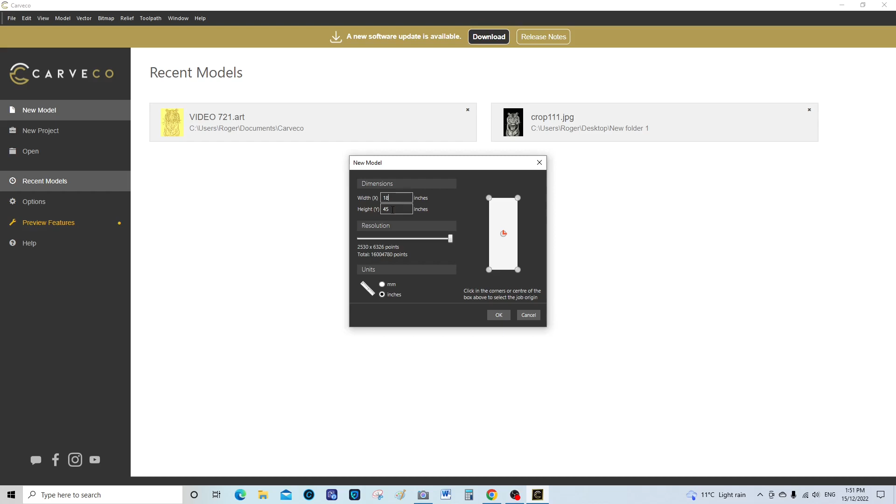So we're going to say OK. So I'm going to be working in the 3D screen today. So that's the 2D screen, and this is the 3D screen.

And we're going to, first of all, use several tools here that I don't normally use, so I'm going to be introducing them to you, or shall we say several processes.

Now, to use these processes, there's a particular way of working. So what I'm going to do is, first of all, draw just one single line at the top of our piece of work there. Now I finish, and then I'm going to draw a line on the bottom of our piece of work here.

Now in Carveco talk, these are drive rails. In other words, it's like rails for a railway. I am going to do another shape just off the piece of work here, and I'm going to tell Carveco that I want to run that shape, or drive that shape, down these two rails.

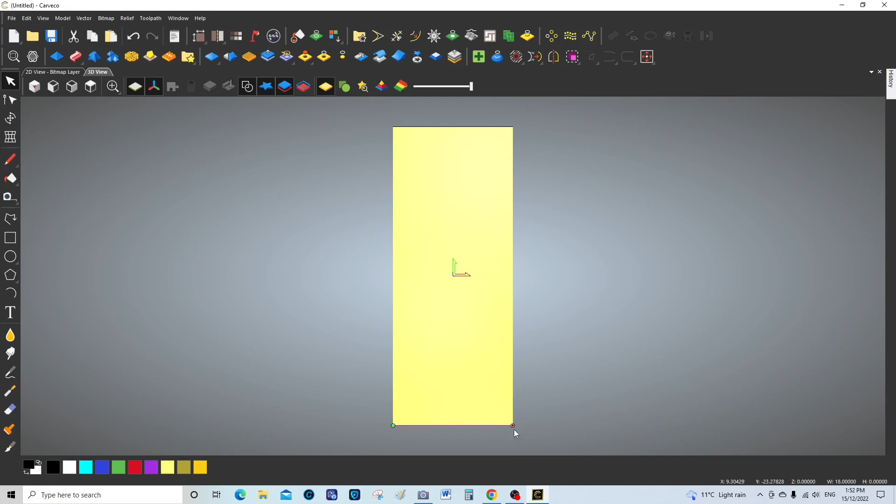Okay, so we're going to pick that tool again, which is a Polyline tool, and we're going to say we want rounded smooth polylines. So I'm going to start up here off the piece of work, well, fairly close to the piece of work actually there. So that's going to be our first point there.

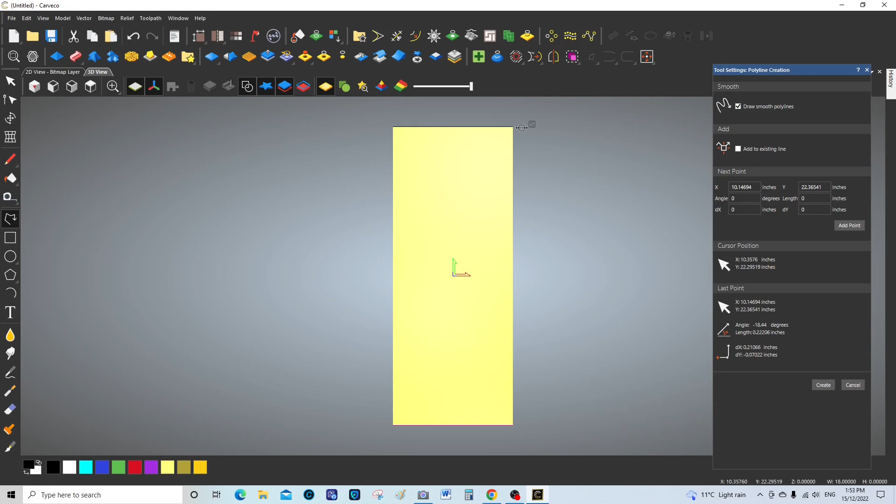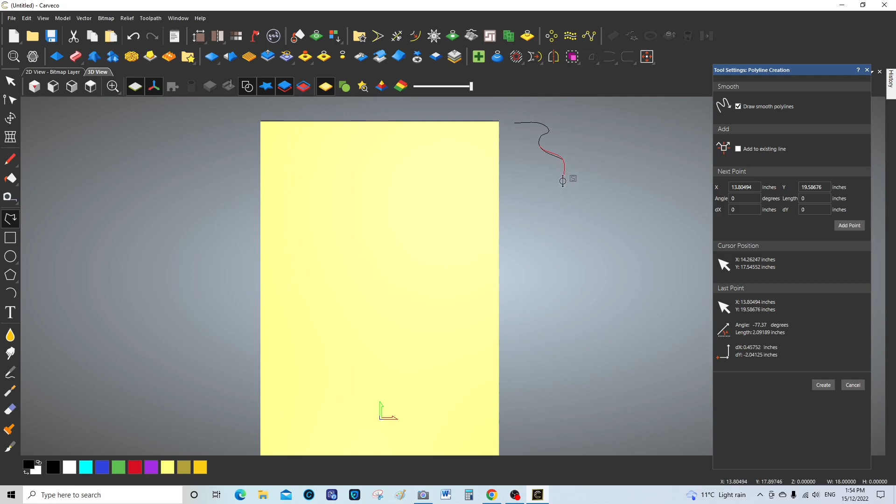I'll zoom in a bit so you can see in a bit of detail what I'm doing. So I'm going to come out here a bit, just put a bead, as it were. Make it a nice big bead. So I'm going to go here like this, and just wrap it around there like that. I'm going to come down a little and then out this way. Just a pleasing sort of shape, really, that you would sort of expect a sort of a bed head. Hang on, let me just come out here a bit so I can see what I'm doing, get a better perspective on it then.

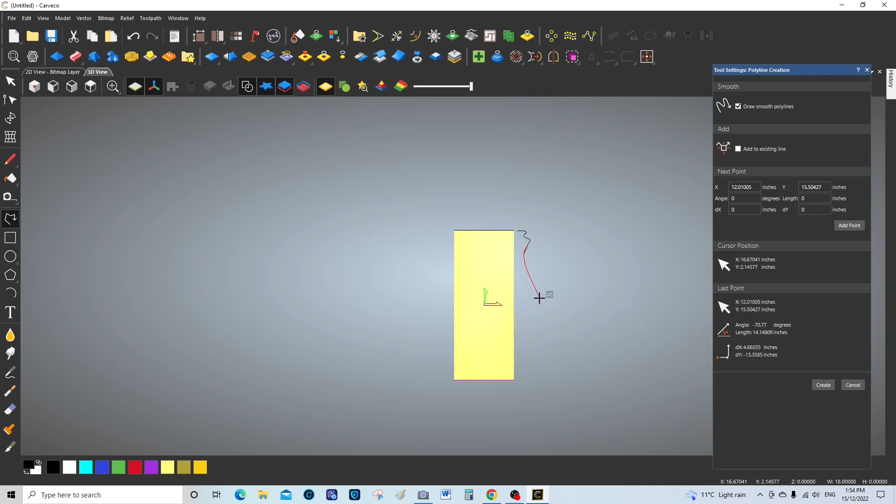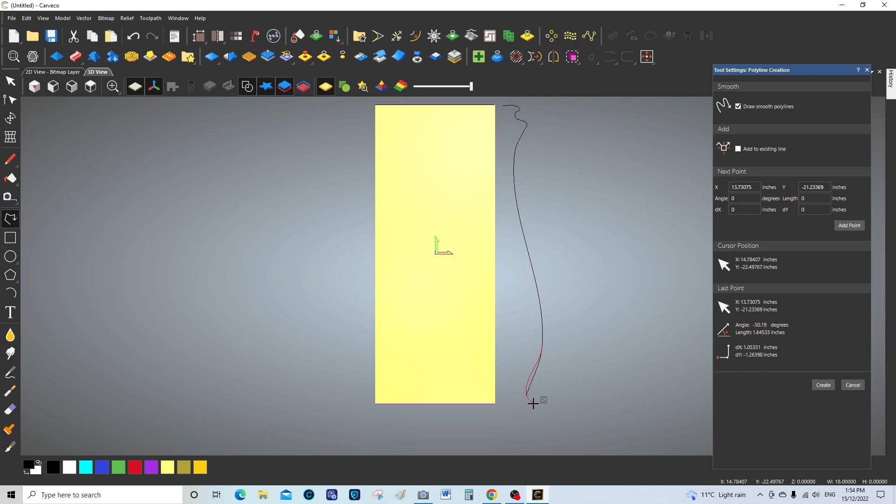So it's just going to be a rounded, elongated shape like this, sort of like a banister support. We're going to come in here a little, and that's good enough, and another small bead down the bottom here. Zoom in, sort of like there, with a little bit of a flat on it, like that, and finish.

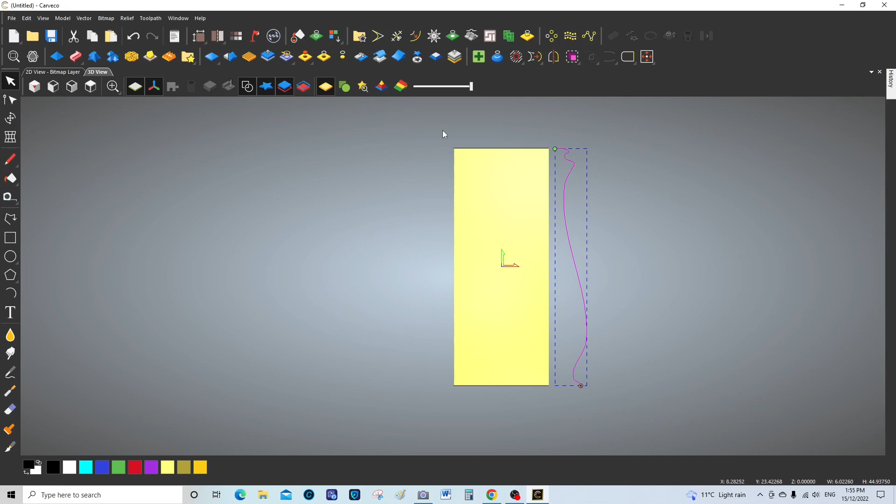Okay, so that's our shape that we're going to use. Now I'm going to come up here and choose the 2-rail sweep tool.

Now this is a dialog box, or you could regard this as a wizard, and what I'm going to do is choose this top one here, because it's asking you to set the first drive rail. So this is one of our drive rails, so we've selected that, and I'm going to press this to say that's the first drive rail.

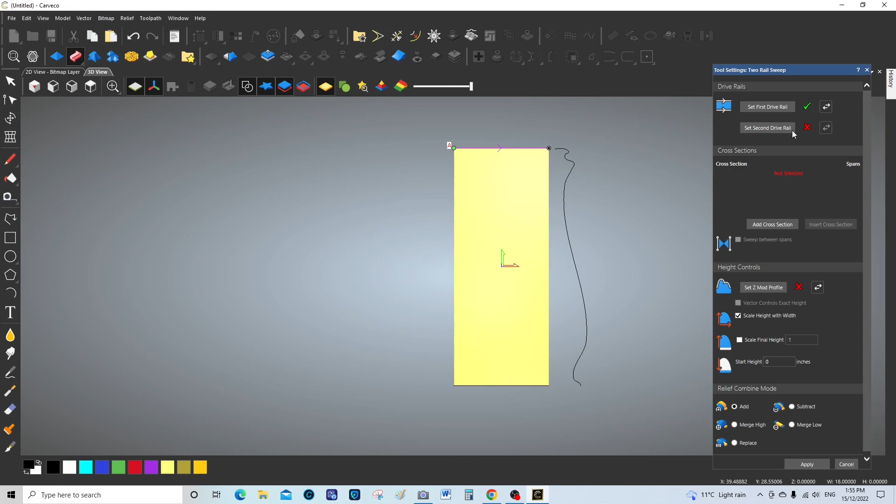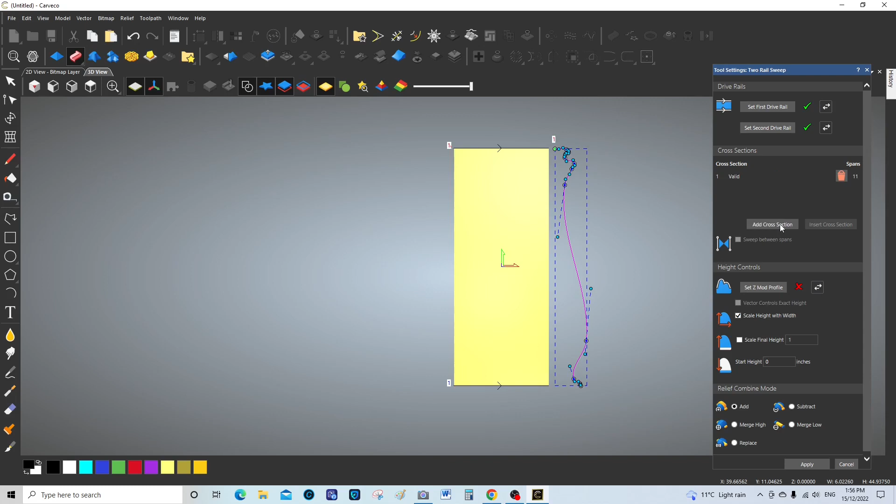So then it asks you to set the second drive rail. Here's the second one, and we're going to choose that. Now this is our cross section. Okay, so we're going to say, well, this is the cross section we want to use, and it's accepted that.

Okay, so the next thing is, it's already set on add. You can subtract it, which would give the opposite, down in this direction. So I would suggest adding this onto the material, and then I'm going to press apply.

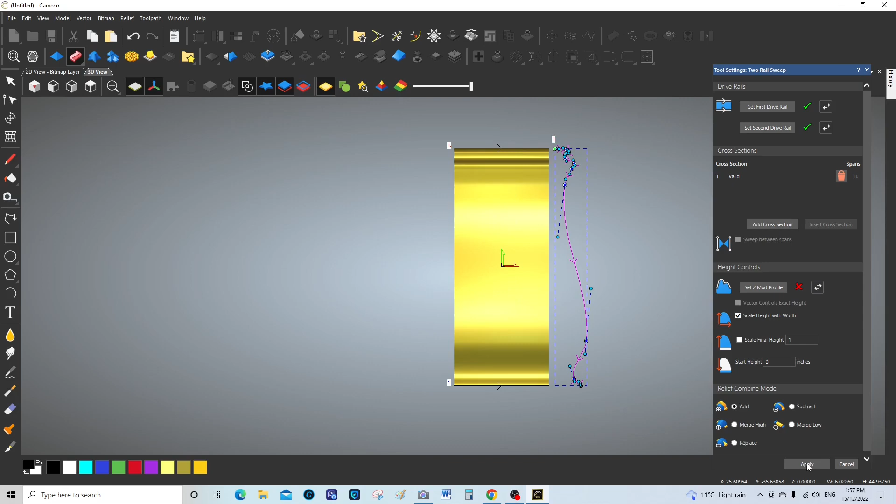We'll drop this, get rid of this now, and go to the Twiddle tool, and twiddle around with this and have a look. So there's our shape that we started with, and I've used the 2-rail sweep to run that shape across our material.

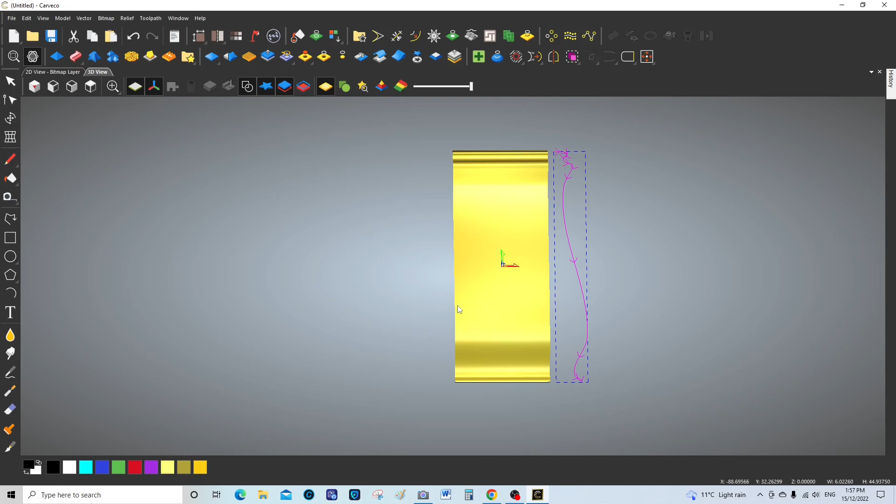And if you left it like that and ran toolpaths, it would carve that particular flat shape - well, shall we say that shape on a flat - and that's all you would have to do if that's what you wanted for something like a pelmet or something of that nature.

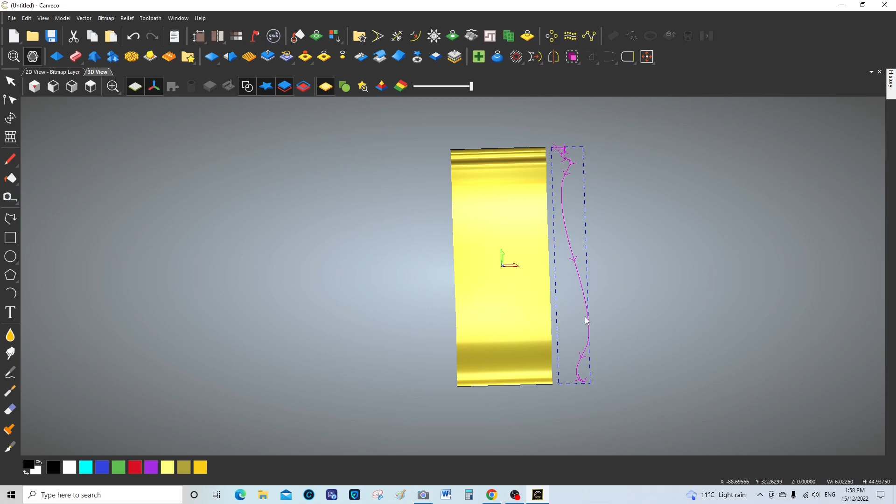But we want to actually wrap this into a Rotary file. But I'm going to do something a little bit more interesting. Let's look at it square on, and I'm going to go back into Carveco now and say, to make this more interesting, let's put a 3D relief on it.

I don't particularly want to - I could put texture on it, but I think we'll put something a little bit more interesting. Let me see, we could put an animal on it, but I think what we're going to do is... post, probably not.

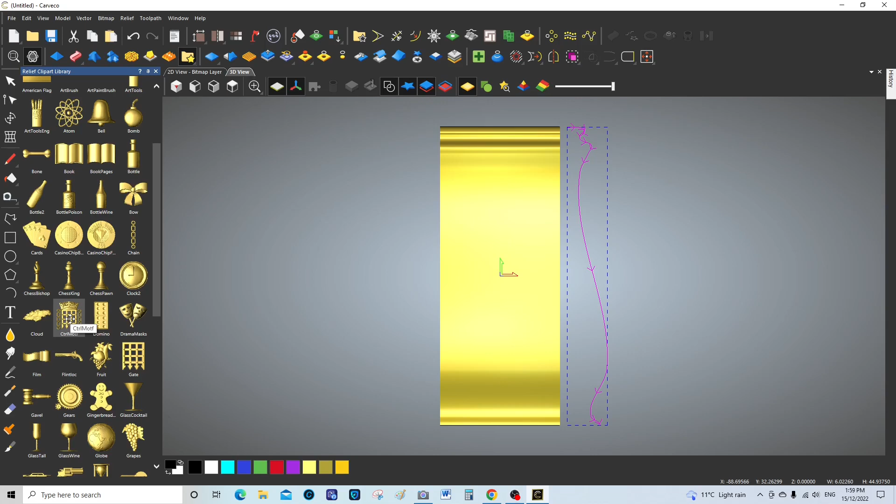So I'm just running through some of these now to just - objects maybe. I don't think there's - oh, here we go. That might be quite nice. That'll make it really royal, wouldn't it? You know, we could put that on. Why not? So I'm going to get that.

I'm going to bring that over here, and we're going to make that a lot bigger than what it is. We're going to say, let's have a look. Oh, that's very, very small, isn't it?

So what I'm going to do is put the lock on. Not really worried about the Z. So what I'm going to say is I want this 12 inches wide, and the aspect ratio is going to stay the same, so I'm going to say 12 inches. That means that's nearly 14 inches in height.

And I want this to be - I don't want it particularly deep, so I think a quarter of an inch would be okay. So I'm going to say 0.2 of an inch actually. I think a quarter of an inch might be too much, which would be 0.25. So I'm going to say 0.20 of an inch for the Z height. I'm going to apply that.

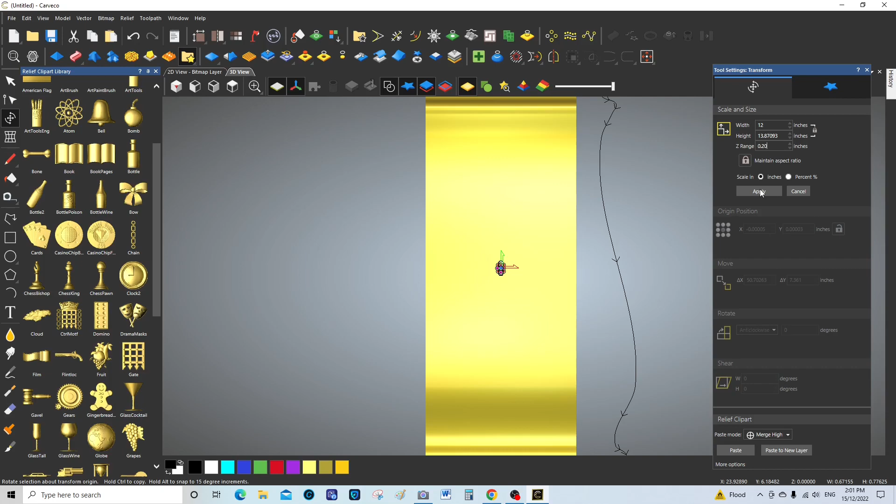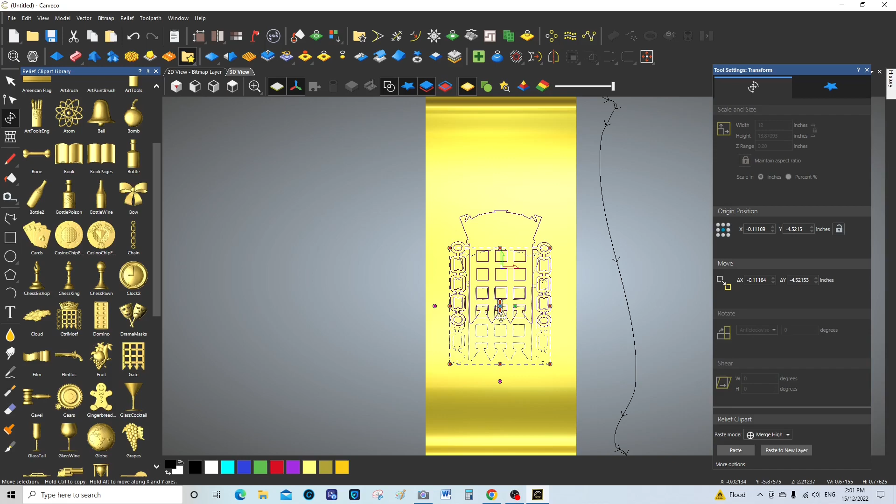Now I'm just going to bring this down slightly and place this by eye. I think I want to place it here, somewhere there, not quite on the tip of our rounded shape here. That would be fine, that's a good area. I'm not particular about placing it to 1/1000th of an inch, I think by eye is fine.

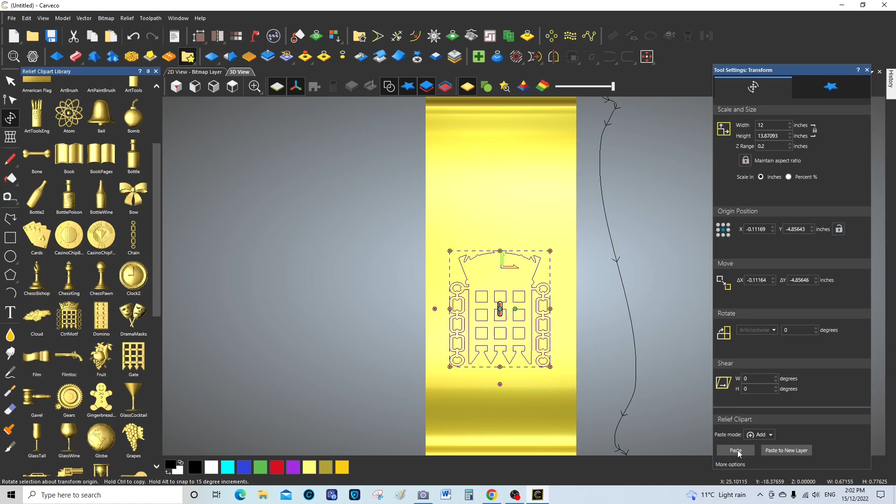I'm not going to say merge high, I'm going to say add on top of the material, because I find that's a better option for something like this. So I'm going to paste that down, and let's have a quick look at that.

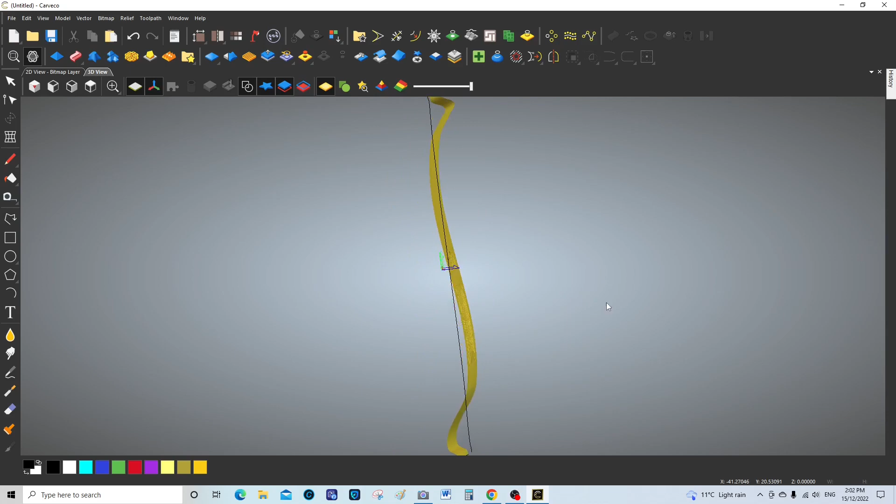So I'm going to get the Twiddle tool again and roll this over. Better get yourself a cup of coffee, this is going to be fairly long. That's okay, I just want an indication, I don't want it to be the major thing in this piece of work.

So what I'm going to do now is wrap this. Shall I wrap this now? No. Okay, I'm happy with that.

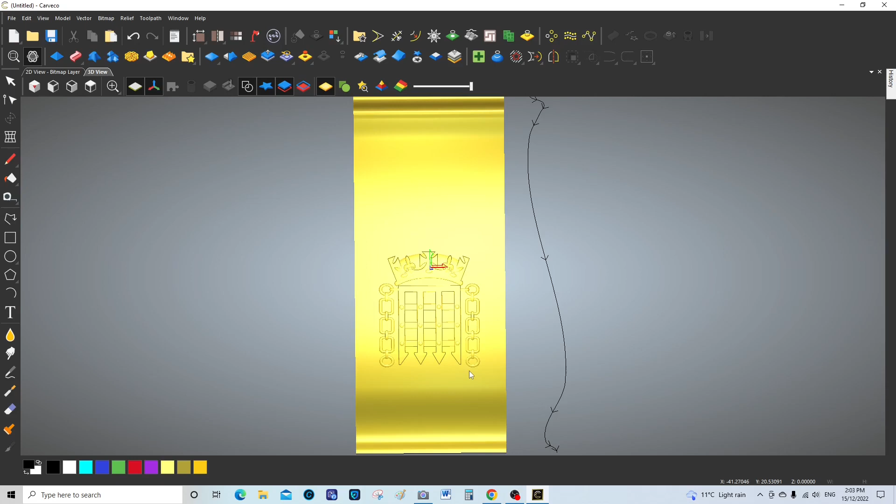So now I am going to machine this first. We're going to go up here to Toolpaths, 3D Machining, and the whole relief. I'll do a roughing operation. Of course this is in millimeters, now the inches tools are all the way down here, you just open them. This is a tool tree then.

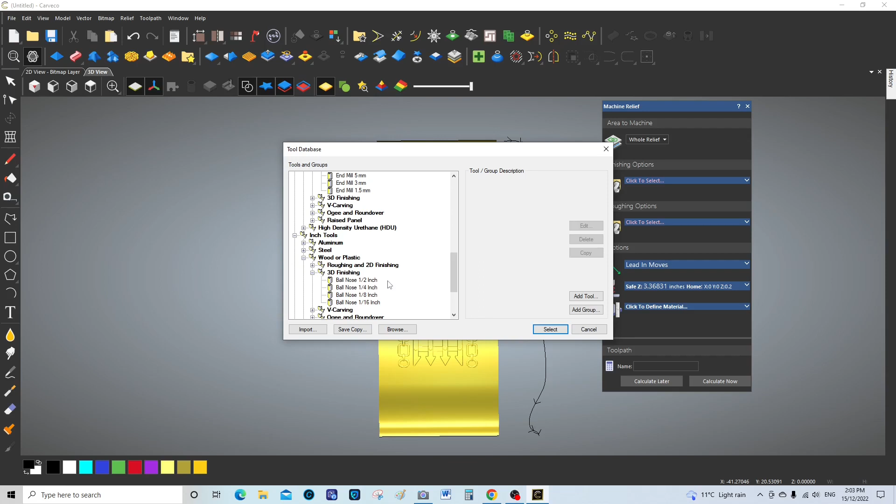So we're going to use a 1/2 inch ball mill for the roughing operation, to get rid of the material really quickly. So we're going to select OK for that.

We'll go in here, we may as well set the parameters for this now. I like to separate this out between the roughing and the finishing. So we're going to say step over 0.6 of an inch - I think we can actually go 0.2, since this is a roughing pass, that'll be fine. Step down, 1/2 inch step down, yep that'll be fine, but probably we'll go a little bit conservative here - 0.3.

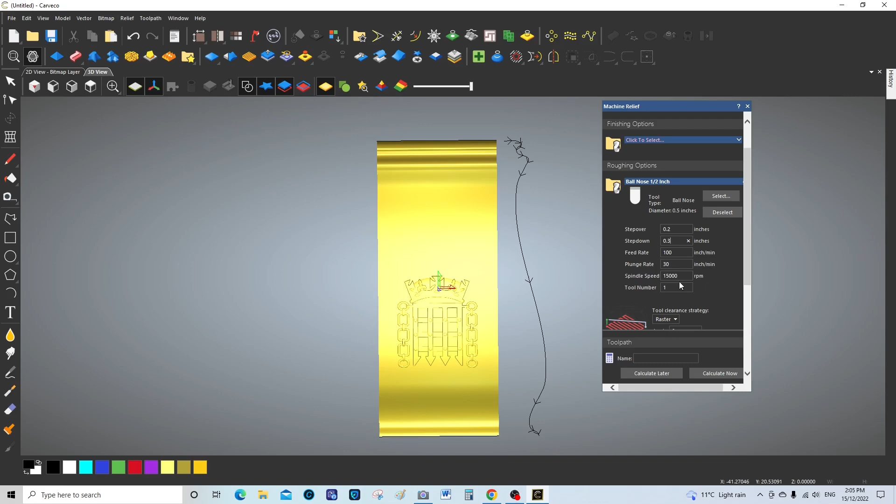100 inches per minute, probably okay for the rough end. 30, yep that'll be okay. Carveco has in this case picked the correct settings for this. We'll leave this pretty standard, not really worried about lead-in moves. My router is a 2.2 kilowatt router, it's fairly powerful, so it'll handle that just fine.

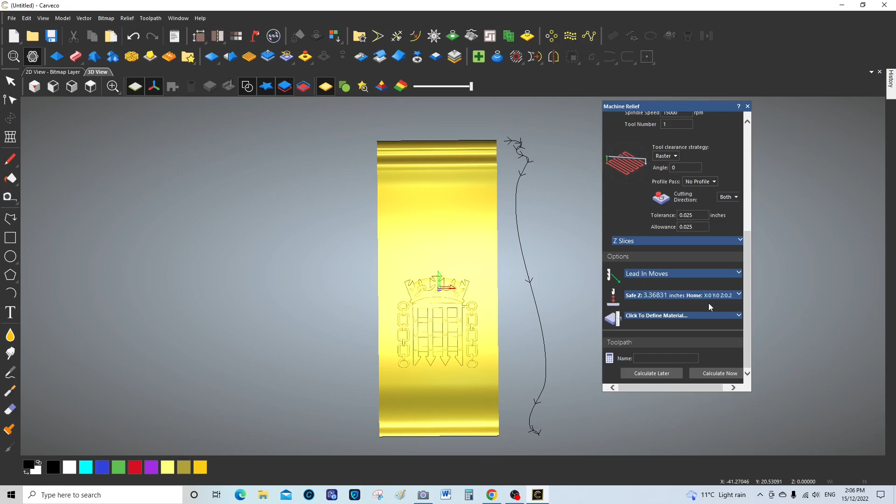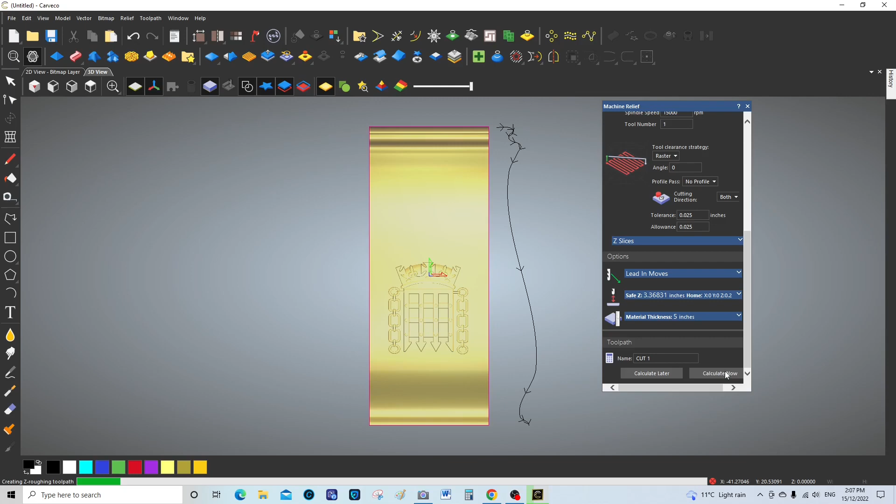So I'm just going to abbreviate here, I'm just going to say this is cut 1, and calculate now. That's fine.

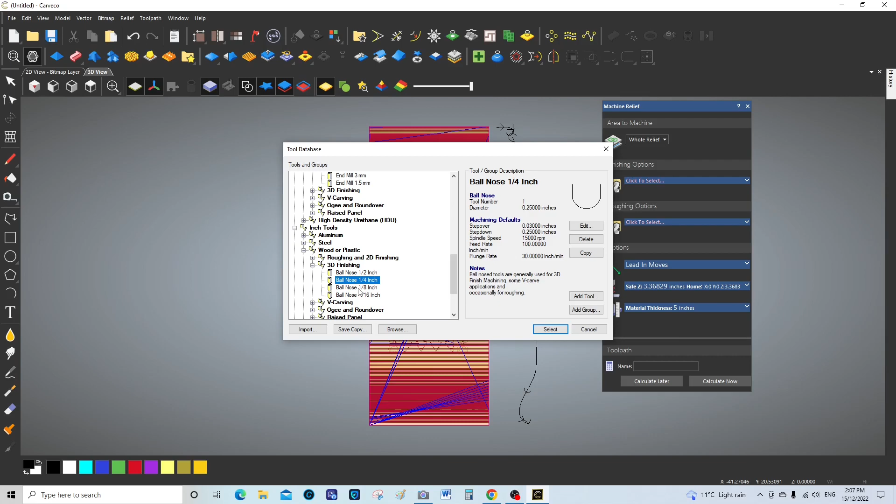What I like to do is get out of that entirely, go back into this - it's just my practice that I do. Finishing, whole relief, come down here. Now I would think that a finishing for something this large would be fine with a 1/4 inch tool. No need to go any smaller because there's no fine detail as such. So I think that will be fine, I'm going to select that.

So let's check on the parameters. I'm going to go with that because the closer you can make the step over, the less finishing by hand with sandpaper you have. Step down, 1/4 inch step down, yep that's fine, probably wouldn't go any deeper than that. Feed rate 100, yeah that feed rate's fine, and the plunge rate is okay.

This I'll probably take up to 20,000, I think that would be more realistic. Everything else is the same. So I'm going to put this down as cut 2, 'fin' for finishing, and we're going to calculate now.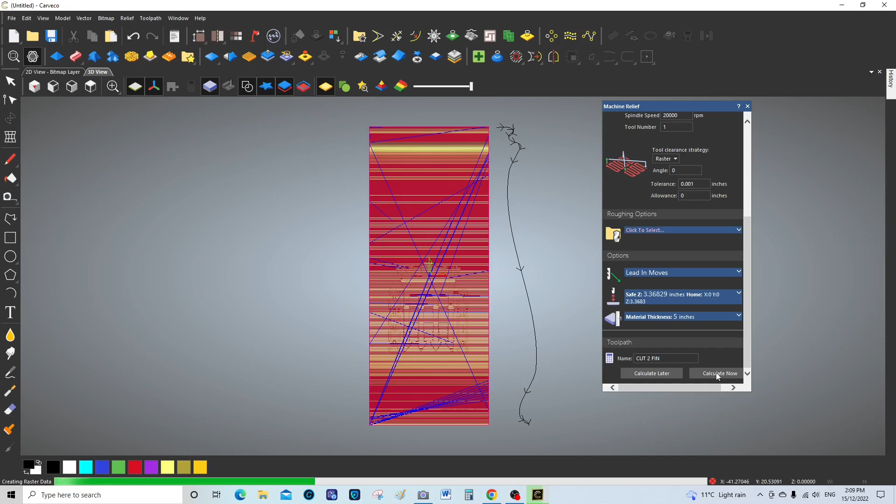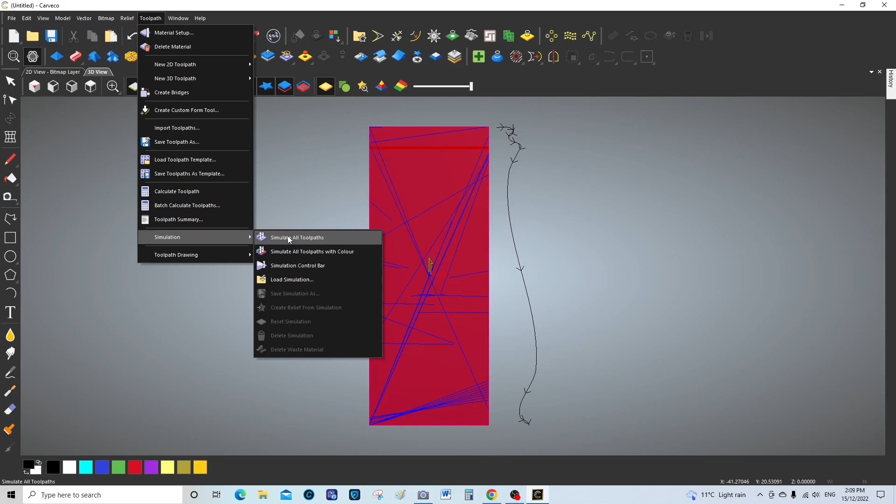Okay, so we're going to come out of that, and what I'm going to do now is come into relief - oh, before I come into relief, I'll machine that. When I say I machine that, I mean let's do a simulation on this. All toolpaths, very fast, simulate. And there it is.

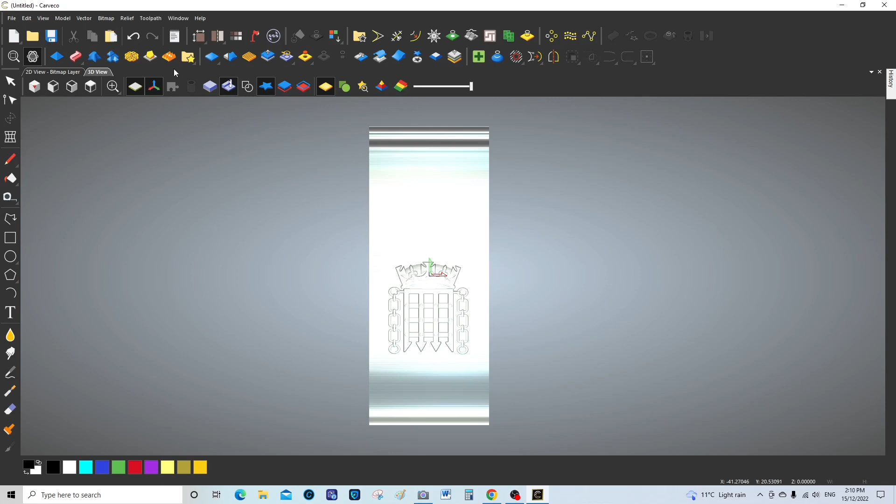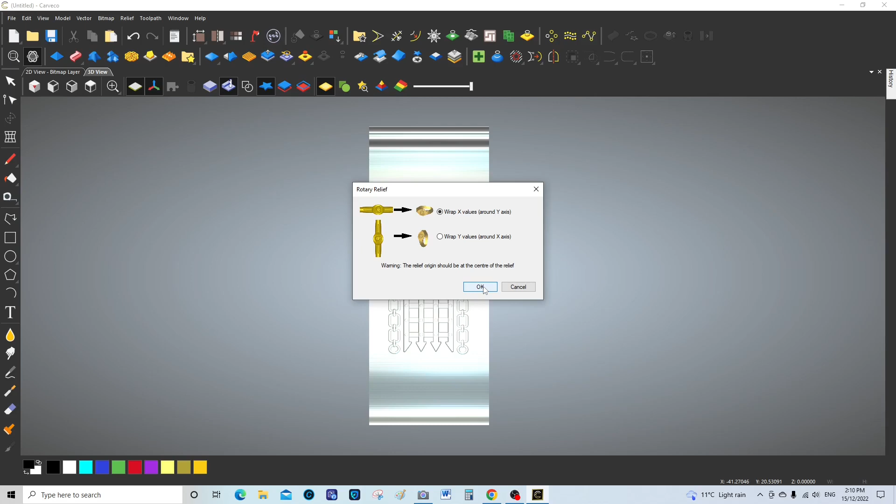Now then, wrapping - very easily done. You come up here to relief, scroll down, create rotary relief, wrap around. Now I normally wrap around the Y, because my A axis runs sort of north-south on the table, and there it is - obviously the gold is the wrapped version.

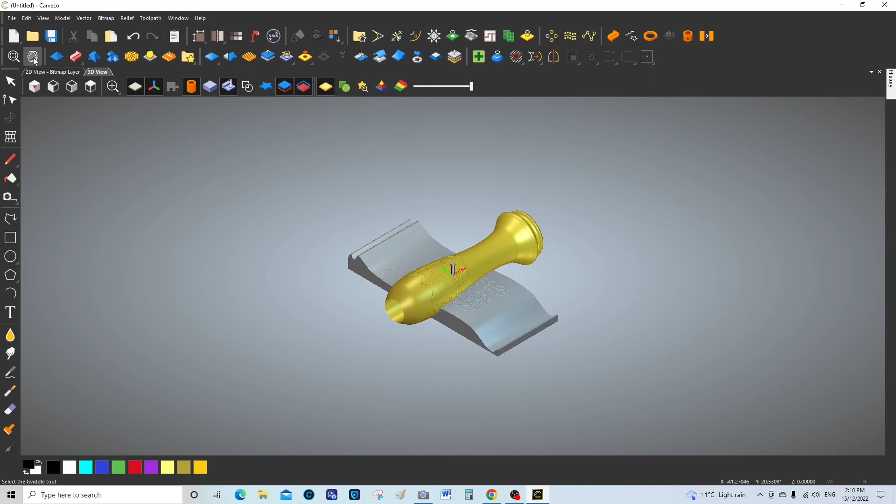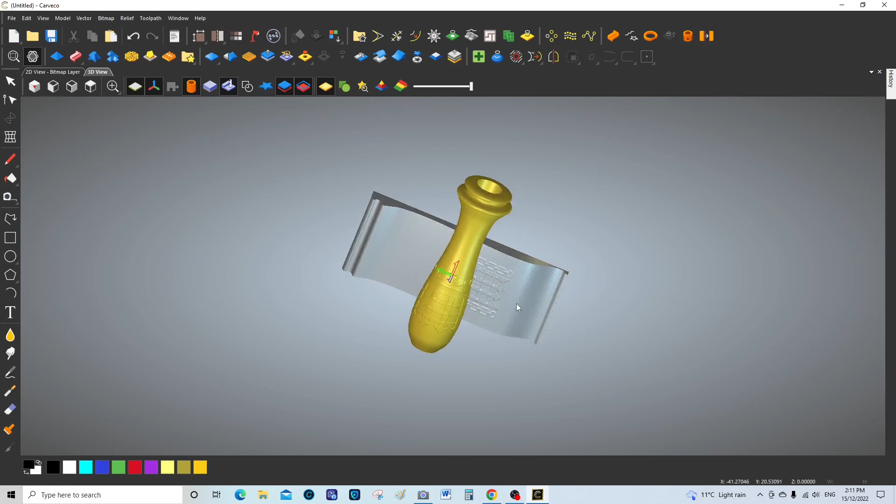So let's get the Twiddle tool and have a look. It doesn't really matter that it's showing the flat version there. I think you get the idea that this is now a rotary piece of work, and you can see that the design has actually come out on the rotary version as well.

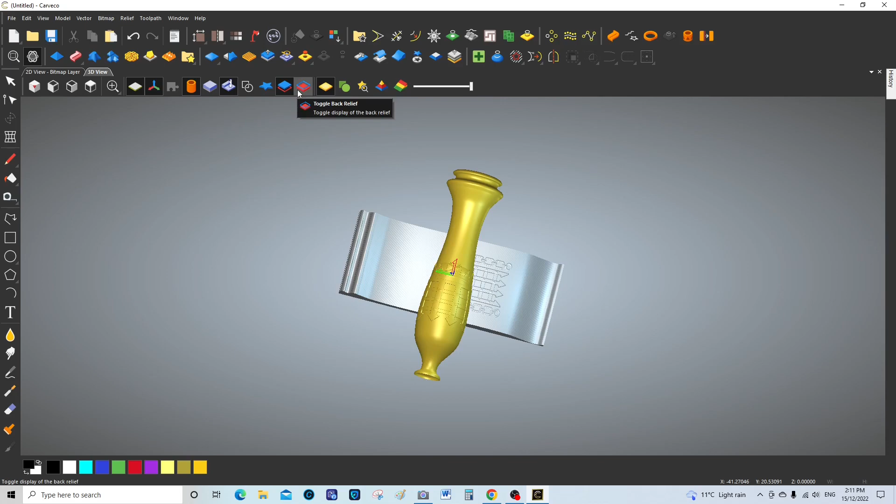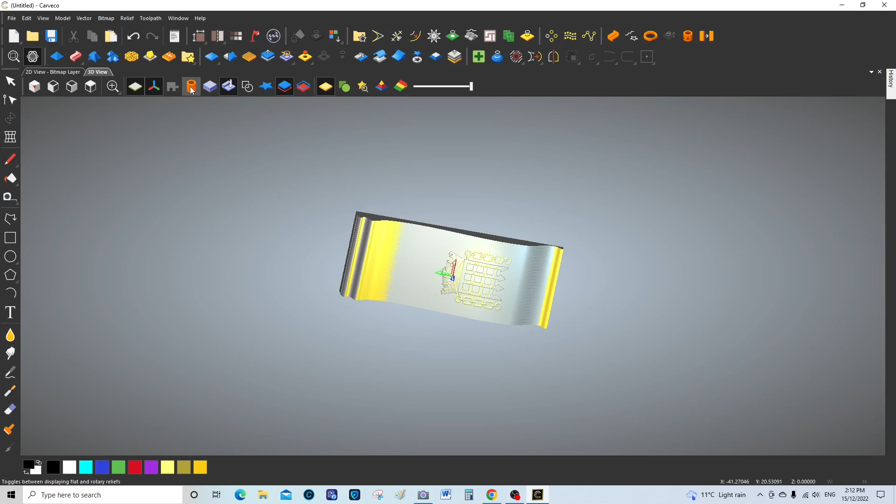That's a little better. So I'm just flashing through some of these tools so you can actually see what they do, and that's turning the rotary relief on and off.

Test one, let's cut one actually. Cut one. Now then, rotary file. In my case, because I am slaving the rotary axis to my X - in other words, plugging my rotary axis into my X axis, disconnecting the X axis - the previous video to this will show you how to do that.

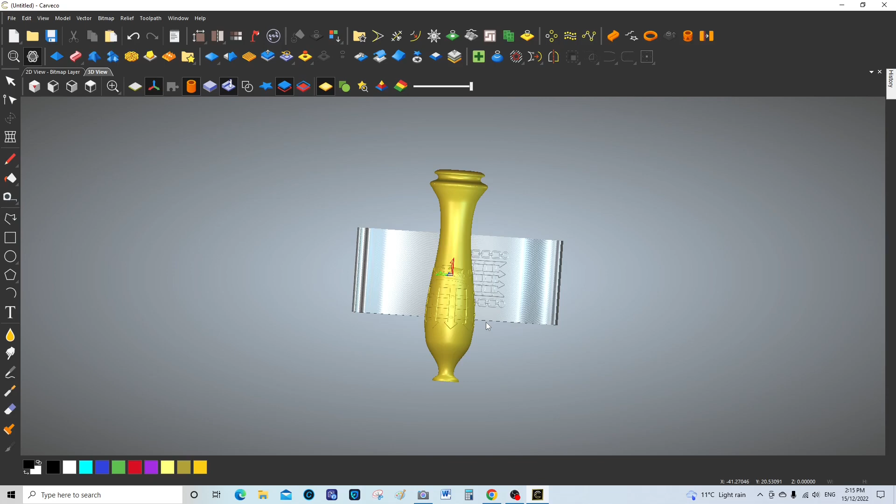So this was a very, very quick shape. I just roll it around so you can see. If you have a specific shape in mind, it's very, very easy - should I say simple - to make the shape that you require.

You can sort of make it a specific measurement, but I find with wood, so long as you're within 1/16 of an inch, it really doesn't matter. You don't have to be more accurate than that, especially with a large piece like this - this is 45 inches long. Length doesn't matter, I suppose. As long as you're within 1/16 of an inch, it's going to fit. You can make it fit.

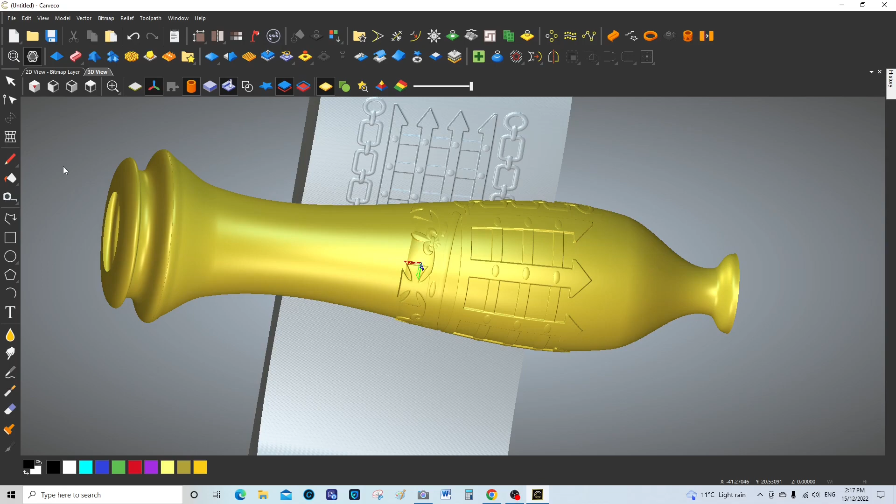Okay, so that really is the full process of making a fourth axis file with Carveco, the full industrial program. The guys behind this program have made it so easy. This is an industrial program, and if you are in the business of making wooden or metal high-class parts or objects in an art formation, there isn't a program out there that will touch it. You can see how quick I actually put this together and made it look so simple, because it really is simple to use.